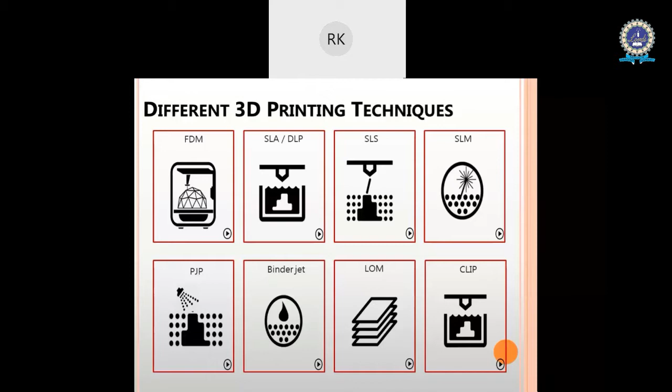So this is a brief about 3D printing. And we should also talk about the advantages before getting into the demo session for today.

The advantages of 3D printing are large. There is no need for a large setup or procedures which we need with CNC, tooling, die creation, milling, drilling, cutting - a lot of processes. These processes are nowhere needed when we have a 3D printer in hand. We can directly complete the process and get the things out. So there is no need of large setup in the 3D printing process.

So next is the limitation. What are the limitations in 3D printing? There are no limitations on complexity and creativity. The major thing I am working about is you have an idea, you can execute it in any of the 3D modeling software, get the project object out, and then you can 3D print.

For example, we have so many softwares like 3D Maya, Ansys, Catia. You can just design your file, take the file out of it, save the file, and print it without any complexity. If you go to regular manufacturing, it is very tough to get the object out in minimum time, and complexity issues will always be there. So that is where 3D printing has the biggest advantage. There is no limitation of creativity or complexity.

Next is shorter time to fabrication. Shorter time to fabrication is when we think about the design of the object and then we are getting the object into your hand. The complete fabrication time is very less in 3D printing. That's where you have the highest advantage, 3D printing giving you shorter time to fabrication.

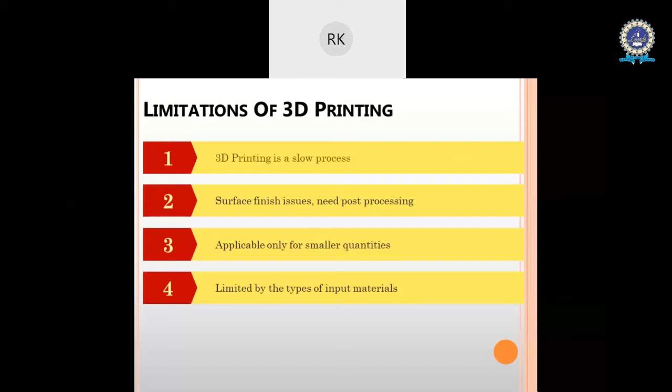And then limited by the types of input material. We can't combine materials, for example, you can't combine polymer and metal. So these are the limitations and advantages of 3D printing.

Next, I want to get into one major thing, what are the sources. We all talk about 3D printing, but people should know what are the sources from where we can start the 3D printing idea or additive manufacturing idea. There are three major sources. One of the major sources is scanners also. As I am telling, there are 3D design softwares where you design your file and save the file in .stl format.

Standard tessellation language format, and then you get this STL file for the 3D printer. We then pass the STL file to the processing software, and then we can 3D print it. So in that way we can do it.

There is also another source: so many websites which give you STL files. For example, there is a website called Thingiverse, where you have a lot of STL files. There is no need to do the design and create the STL file yourself. From there you can take files that are appropriate or sizable for your present use. So you can just download the file from Thingiverse and use it as input for the 3D printer. That is the second source I am talking about.

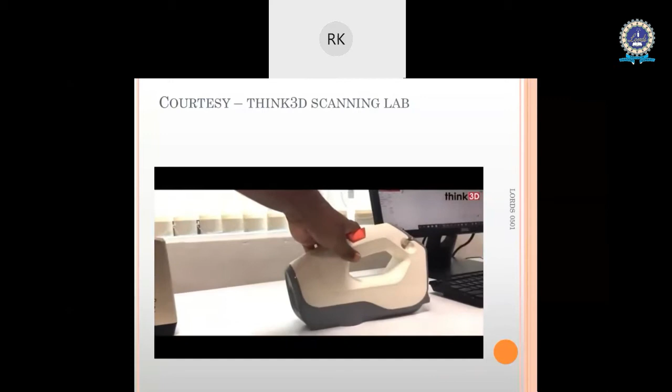Now these are the handheld 3D scanners. This is Sense from 3D Systems; it uses photogrammetry with depth sensor technology. This is Einscan Pro Plus from Shining 3D; it uses white light technology with an accuracy up to 100 microns. This is Artec EVA; it also uses white light technology with an accuracy of 100 microns.

Now these are the desktop type scanners. This is Solutionix C500 from Medit. It is a blue light scanner with an accuracy of 10 microns.

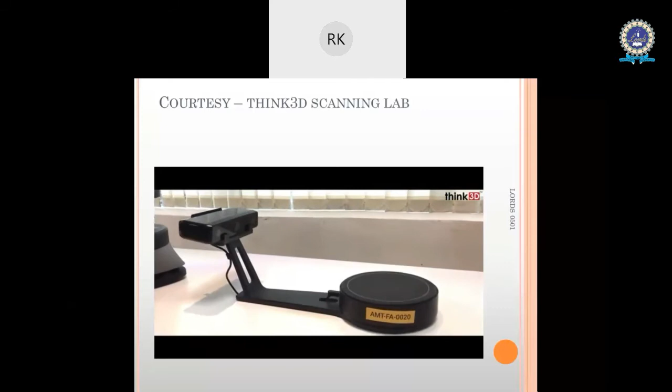This is Einscan SC from Shining 3D; it has an accuracy of 100 microns and uses white light technology. Now this is an intraoral scanner from Medit; it has an accuracy of 5 microns and uses blue light technology.

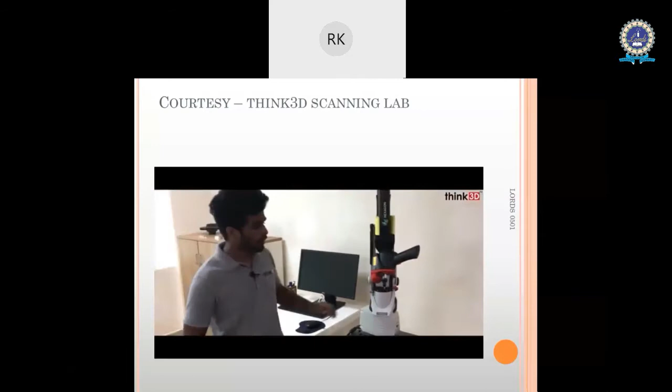Now this is Absolute Romer Arm from Hexagon. It has both scanning and probing inbuilt. It uses laser technology and has an accuracy of 40 microns.

Let's see a demo of this 3D scan. Here, we're going to scan a filter of an air compressor using a Solutionix C500 scanner. Being a desktop scanner, it has a rigid scanner head, and the object is placed on a 3-axis rotating table where these rotations are controlled by a scan path set in the software. The scan path can be customized based on the features on the object and the regions to be scanned.

As this is an optical-based scanner, it has a light source or projector which projects the light onto the object, and it has 2 receivers which receive the reflected light from the object. So let's set the scan path and start the 3D scanning.

If you see this video, this is the scanning which will be happening, where the light source, as explained in the video, the base will be scanning, and then you see the topmost light moving, and your base is continuously rotating to make the object on the screen on the left side. On the left side, you have the scanning being done, and the output is coming into the system. So this is how the scanning will be happening.

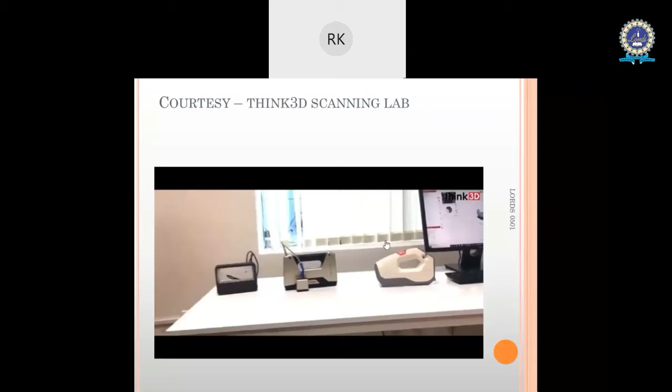The next one is Solutionix, which my colleague in Think 3D is talking about in the video. This is a very high resolution scanner which can give you an output of 10 microns also. This is from the Solutionix company, from Medit, which is used for high-end scanning purposes.

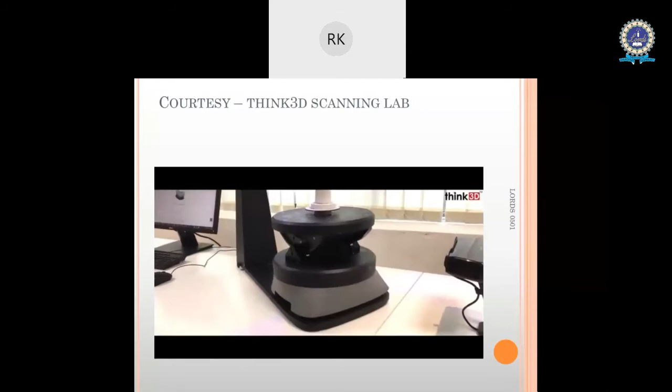This scanner has a rotary table on three axes which rotates in coordination with the light requirement, and it scans the object. This scanner is used a lot in high-end industrial purposes.

The next one is also an Einscan, which the video was screening, but this white light technology does not have that high accuracy. This has an inbuilt rotating table. It is a small setup. This is also for the education version. This is called Einscan Pro SE. This model has accuracy up to 100 microns.

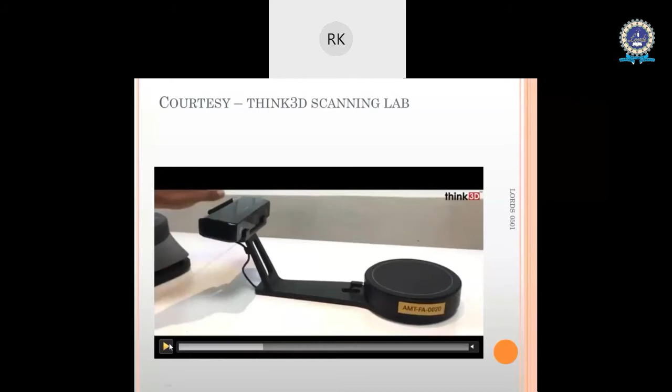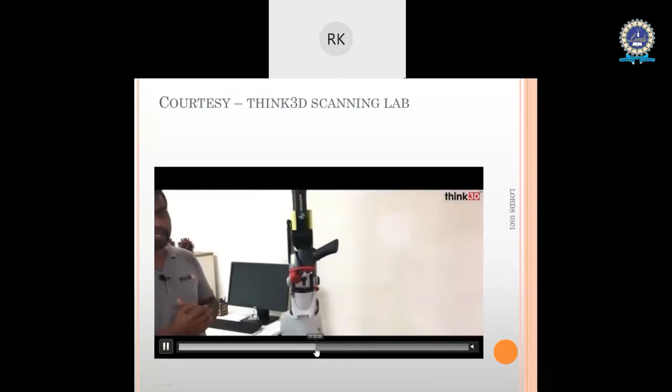This is a foremost advanced scanning technology where we use an arm to detect the output, you take the output out of it, and then we use the image, and this is a laser light. The major difference between the other scanners and this one is it's more accurate, and laser light will be there, but still we have the output coming in very nice ways, because this is the only solution scanner which is giving 5 to 10 microns. Sometimes it gives 5 microns also for the object.

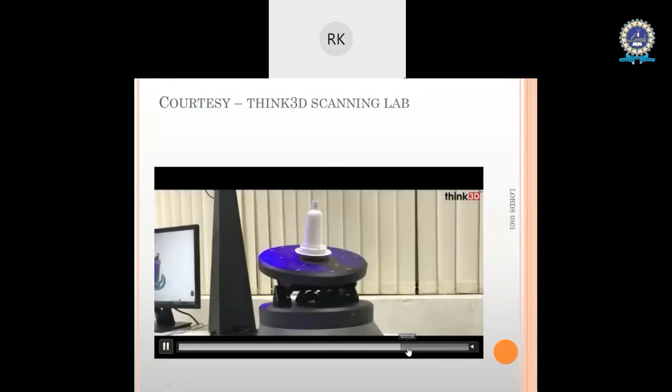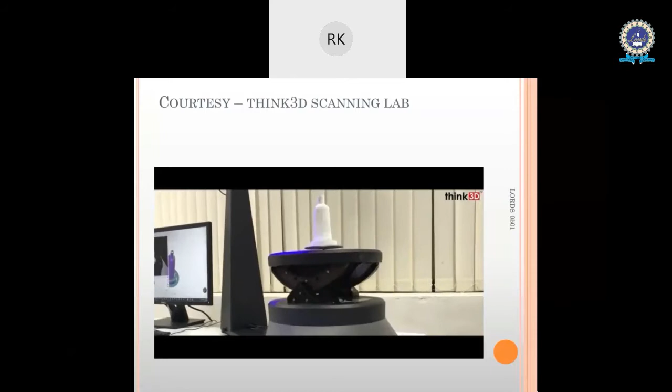So you can see the left screen, the camera is projecting on it, and then the light will be projecting on it, and then you see the rotating table moving in all the directions in all the axes to make sure the complete object is being scanned. And the main line of 3D scanning is one light will be projected, and the light diffraction is being generated as an image or a file on the back end of the system, and then the output is being generated. So that is how the complete scanning will be happening.

If you see on the left side of the screen, you have this pink color output coming out after the light is focused on the system, and then it is being checked, and the system is more accurate, and all the intricacies and all the movements can be done. You may be wondering how we can mount this particular object. We have some mount points on that particular base where we can fit the object.

And suppose you may have the doubt how we can do the beneath area of the object. See, this is how we will be doing it, and afterwards we rotate the object and keep it on the base table, and then we scan it again. The system automatically takes the particular object in all the areas, and the base is also getting scanned, and then you will be getting the output from it. So this is how the scanner works, and the scanner principle will be the same.

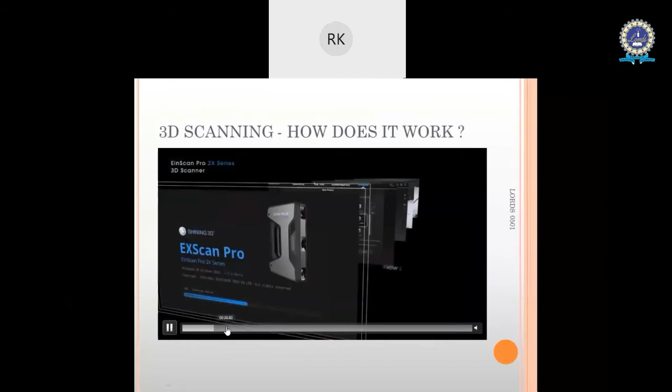And then I have told you about EinScan, so you can just have a glance at the same EinScan system. This is a company video, but I am trying to make sure that you understand better, because the scanning can be done in different ways. If you see, there are so many ways in which we do scanning. This is a handheld scanner where it can scan any object. Now it is scanning a seat, and it is taking all the data into the system, and then you get the output. See, this is how we get the quality.

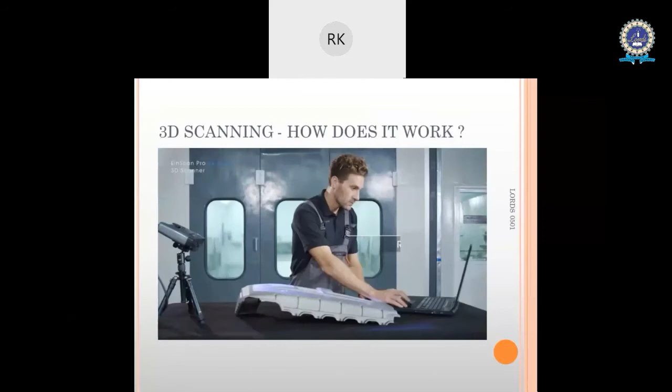The quality of the object will be excellent. You will not imagine how good a quality you will be getting. Even the face structures, these things also will be captured very well. And also, you may be having a doubt: can we use a reflective surface? No, a reflective surface we can't scan, because the light will be reflecting back and you will not get the output out of it.

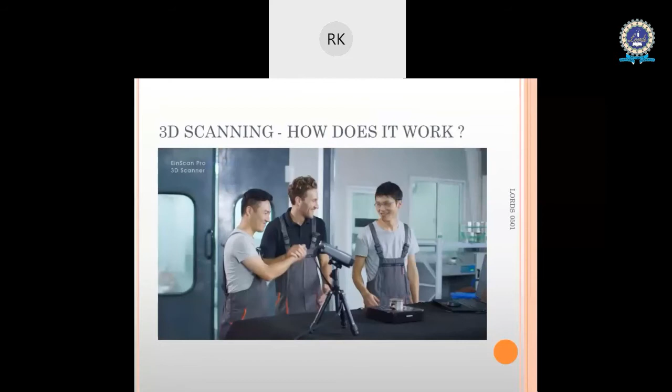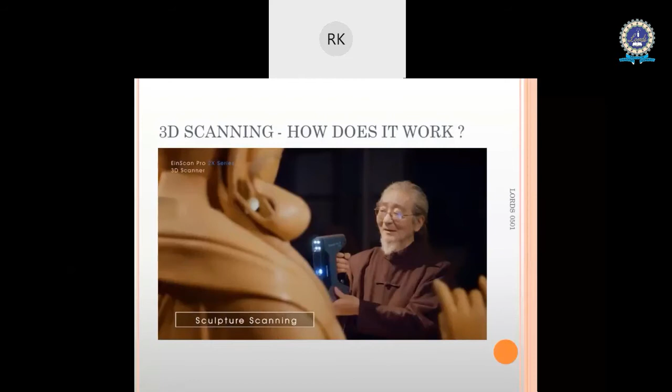So, coming to architectural scanning. See, we have architectural scanning also. We can have the outputs, and then we can take the outputs of it and process it. See, this is one of the processes where we have scanned it, and then we can take it. This is an architectural thing. You can take that particular image, scan it, preserve it, and even save the file in .stl format.

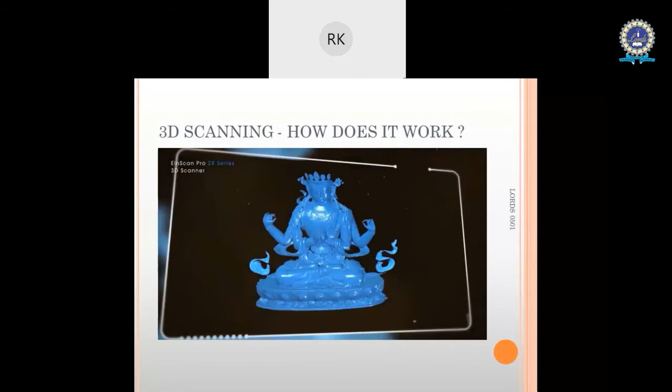Then you can print as per your requirements. Your idol may be destroyed, but your soft copy of the idol will be existing as it is, as a soft copy you are seeing on the screen.

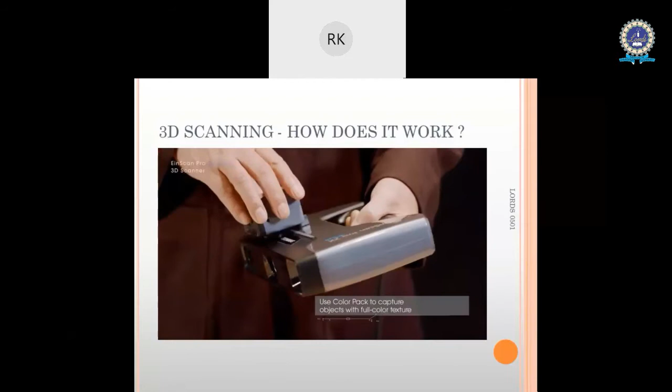Coming to the complex structures or symmetric structures. In the symmetric structures, we have to put small dotted labels and then we scan the object, because dotted labels give you a clear pattern and then we can get the output of it. In this example, in the video which you are seeing, it will be giving a multicolor object also, which we can scan, and then we can get the multicolor output also from the scanners.

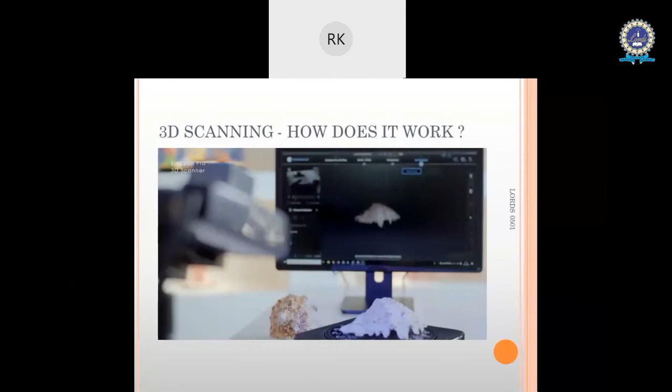So that is the way we can scan the objects, and then we can take the file and save the file in the 3D printing format. So this is how we scan the object, and this is the scanning which we discussed, and the scanning of objects will be done like this.

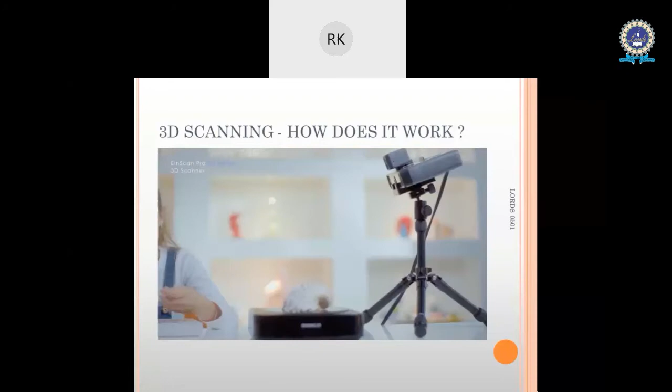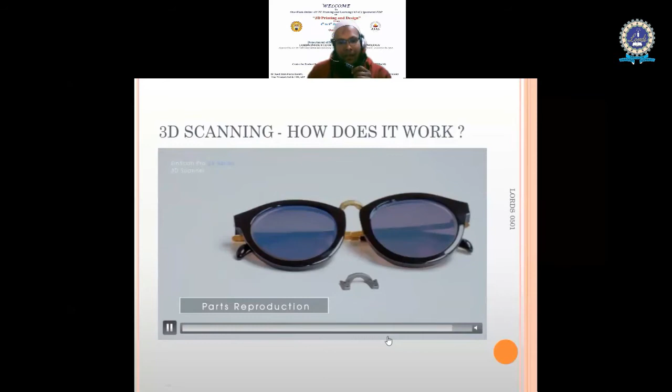So before getting into the next thing, I just want to take any questions on scanning, because I am going to the FDM and SLA demo, which is a bit different. Mohammed sir can open for 2 or 5 minutes for questions, so that I can close this scanning part and then go to the next level. Sure, sir. All the participants are requested to ask questions or any queries regarding these scanners. So the first question will be mine, sir.

Sir, for different applications, for different accuracies, we use different scanners. That's the only reason? Yes. We have different uses, for production or for reverse engineering of complex structures. We have different uses in terms of accuracy, in terms of color, shade, and appearance.

See, to explain in depth, I have shown you different ranges of scanners. For example, for medical purposes like dental, there are separate scanners. Coming to engineering applications and smaller applications, which we can mount on the build plate, we have some scanners. And if you want to do freehand scanning, which I showed with a car being scanned, that scan also you can do.

But for the range of accuracies, depending upon your requirement and the complexity of the object, the first and foremost thing is whether we go for a handheld scanner or a fixed scanner. If you want the highest dimensional accuracy, you have to go for the fixed mode, which gives excellent output.

With handheld scanning, there is a chance of the hand shaking, so the accuracy may differ. For dental, we can go with dental scanning, but in engineering applications we talk about 50 microns, 10 microns. So depending upon the object accuracy you need, you can opt for any of the scanners I have shown you. Hope I have answered your question, Mohammed.

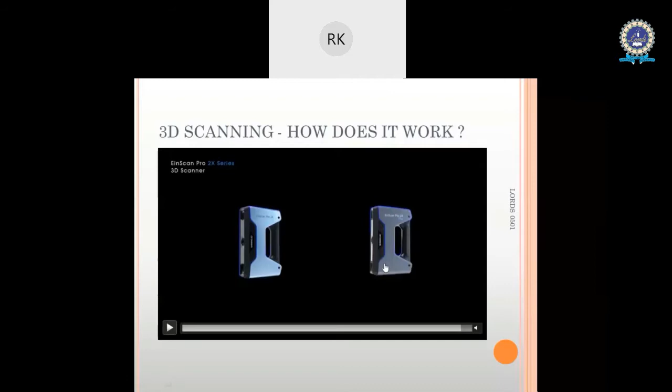So fine, guys. You got a brief idea about scanning, I believe. So I'm just getting slowly into FDM, which we want more knowledge and clear information on. We did the 3D scanning, we got the file done, and then how do we print in a 3D printer? First question people will be thinking: I have a design file in my college, we have ANSYS, Pro E, CATIA, we take the file and we are ready with the STL file.

What next? After your 3D model is ready and your STL file is ready, the next two important stages to consider are the slicing software, then slices and toolpath. What is this all about? Before slicing software, we should understand what FDM is and what it does. So I'll just give you brief information, because people all know about FDM technology.

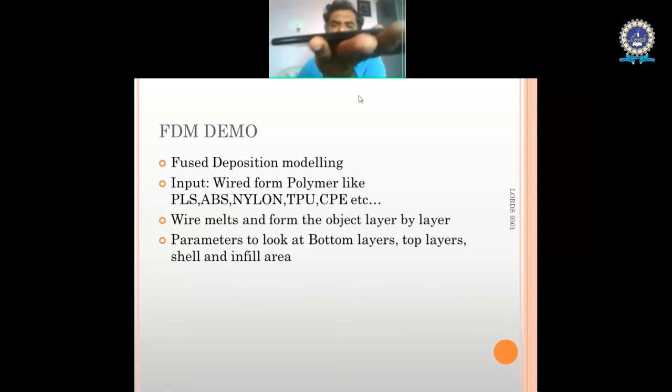It is a layer by layer approach to form the object. We give the wire input, and it comes out as small droplets on the build plate, and then it prints on the build plate. A 3D printer will not understand anything else. If you see my video, it will only understand bottom, top, shell, and infill area. Shell means the outer area.

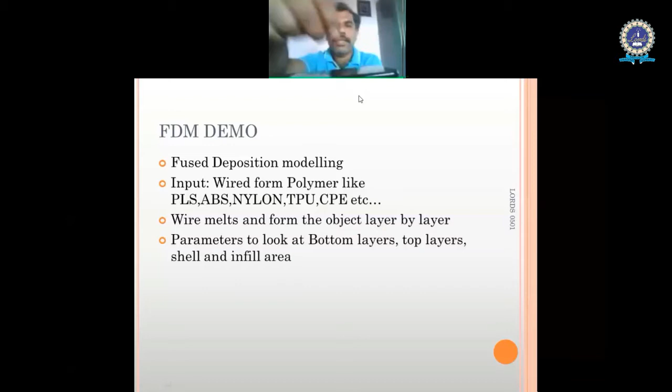So any object we see in 3D printing, it will consider as bottom, top, shell, and infill area. The 3D printer understands only these things. So you should understand on the part whether the bottom is clear, the top is clear, the shell is clear, or the infill is clear. Once we understand that, we understand what slices are.

Pardon, sorry, any issue, sir? No, sir. There are some questions. What about the surface defects, voids, micro cracks while scanning? That's about the scanner. In the last session we're going to have the question and answer session. No problem, sir. You can proceed. Okay, fine. I'll take up this question in the question answer session, at the last.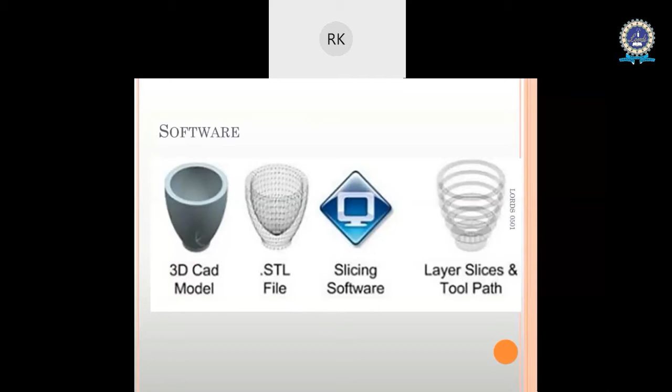So, as I was discussing, slicing software. We have the CAD model, STL, and the slicing software. The 3D printer understands only bottom, top, shell, and infill area. It will not understand any other parameters. So I'll just take things into Cura software.

Hope you are seeing my screen, sir, or only the PPT is getting shared. Your screen is visible, sir. You can continue. This bottle is being seen, right? No, sir, only the PPT is visible. One second, sir, I'll just take the things. Now it is visible, sir.

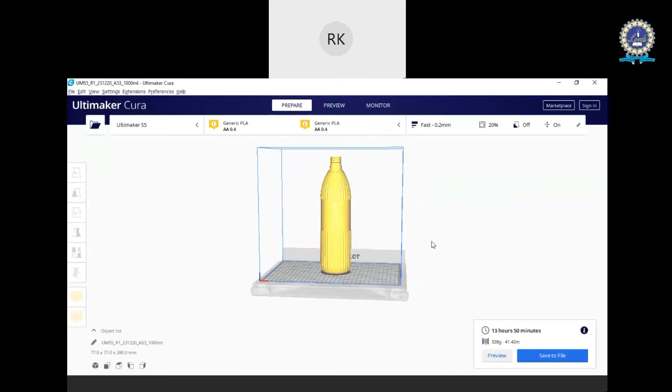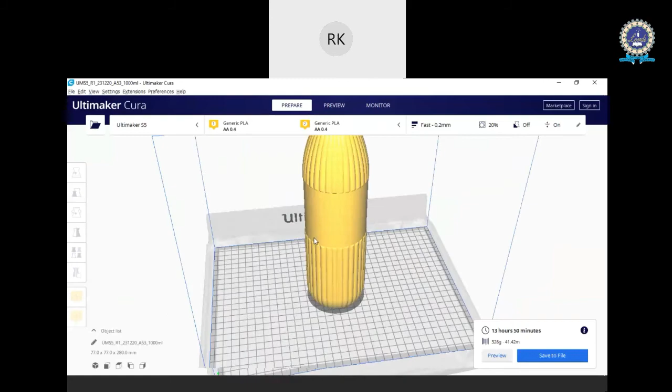Cura, yeah. So you are seeing one bottle very clearly. This we are going to 3D print. So if you see here, the 3D printer understands only the bottom area, the top area, the infill, and the shell of the complete bottle. Now you see one object I am taking.

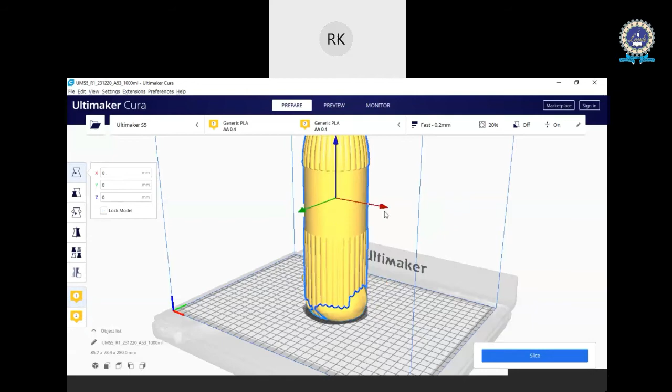This will have some certain infill area. Means if you see, you have a 3D printer. We have this object. If you see this object, we have bottom, top, and then shell and infill area. So we have different shell and infill areas which we are getting on the base, and then top and then infill area.

So what I want to give you the information is you should understand bottom, top, and shell and infill areas, which we have to clearly define in the object before we go for this slicing software. So getting into it, you are seeing a screen here. This screen is called Cura software.

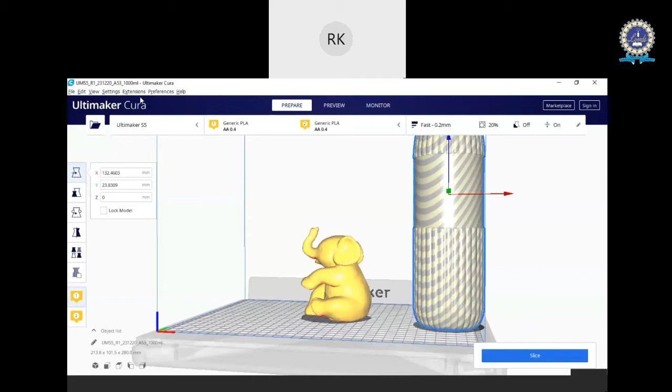This is an interface between your 3D model which you have designed in a 3D modeling software, and if you save the file in .stl format, that particular STL format, you have to get that file into the system. You have seen my screen where I am saving the file in .stl format, and then that file will be coming into the system like this. And this system has a lot of parameters. As I told you, we have a lot of parameters which we have to see.

We have layer height. We see briefly. I don't want to take much time. I'll just show you the brief information which is basically needed for all people. Quality, shell, infill, material, speed, travel, support, cooling system, and then build plate. So these are the parameters which we talk about in all the 3D printers. You can talk about them in any of the 3D printers. You have to have these parameters in your mind.

As I told you now, bottom, top, shell, and infill area in the perspective of the model which you want to print. In the perspective of the system, we have to understand that we have to get a good quality. For good quality, you have to give the system these parameters. See, layer height. What is layer height? You all know how the 3D printer works, but I'm just playing a video for you to make sure you understand better.

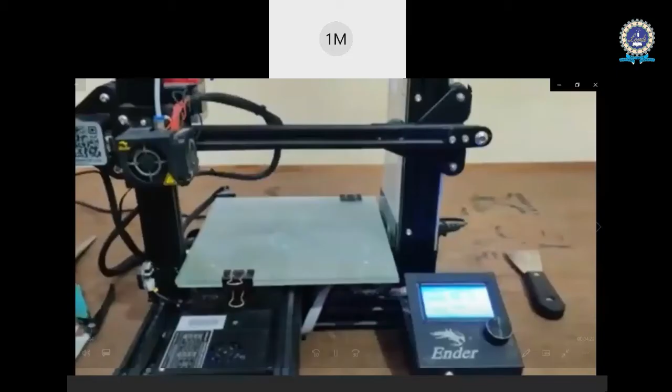So you are seeing a 3D, sir. Hope my video is audible, Mama sir. Video is visible, right? Yes, sir. Visible, sir. Visible. Yeah.

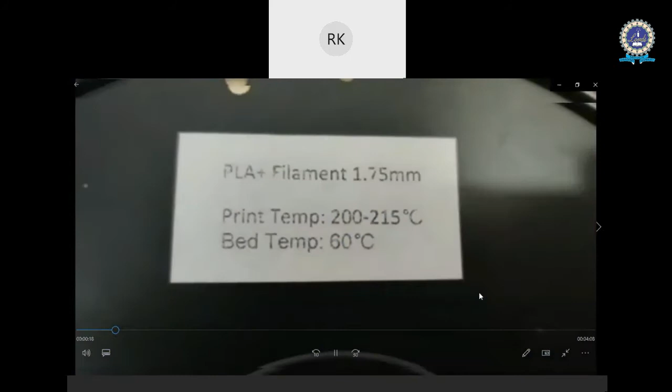See, this is a 3D printer, Ender series. If you see, this 3D printer has a build plate, and then you have a nozzle here. This nozzle is the place where the material will be extruded, and then this is the build plate area where your part will be 3D printed, and this is the area where your complete feedback system will be given from A to Z, what is the temperature and everything.

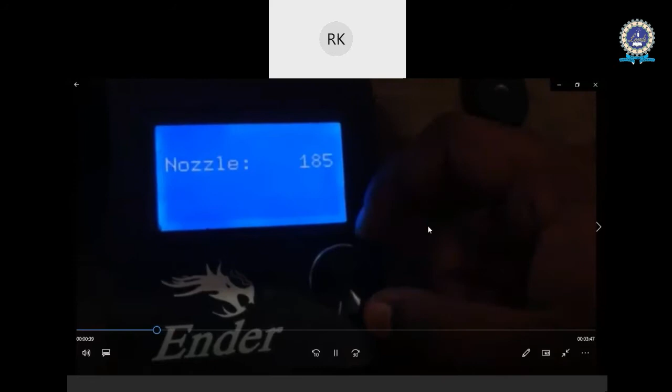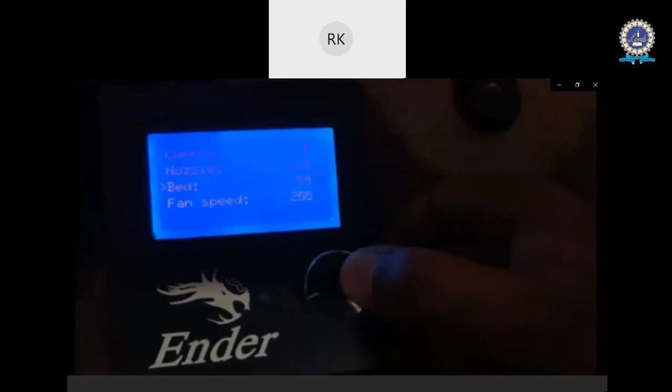I'm just preparing you on the system of the 3D printer before I get to the Cura software. To help you understand better, I'm showing you the printer video now so that you will be more clear. All the settings we keep, nozzle temperature and everything. Depending upon the melting point of the print material, we have to give the temperature settings here. Some materials don't require bed temperature. Some materials require bed temperature. Like PLA material, we have bed temperature.

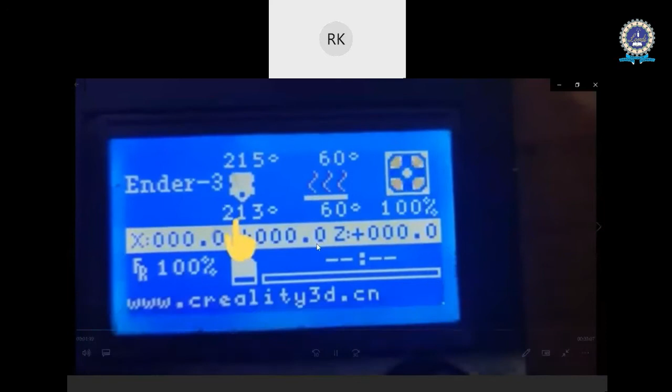So same thing. Once we start, you see the nozzle getting heated up slowly from what we have set, 215 degrees centigrade. The nozzle gets heated up, and then the build plate gets heated up to 60 degrees centigrade, and it forms layer by layer to form the object.

So how do we insert a material into the printer? This is how. I told you material gets inserted into the nozzle slowly. You see here, material slowly gets into it. We take that spring action and then we push the material up to the nozzle, and then we release it.

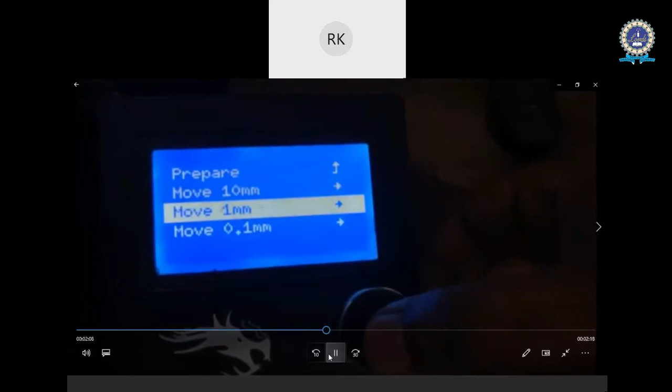You see, once the material touches the nozzle, material will be coming out of the nozzle like this. These are the small drops of material coming out in a liquid, semi-liquid form. It will be coming out from the nozzle like this, and then it will be falling on the build plate.

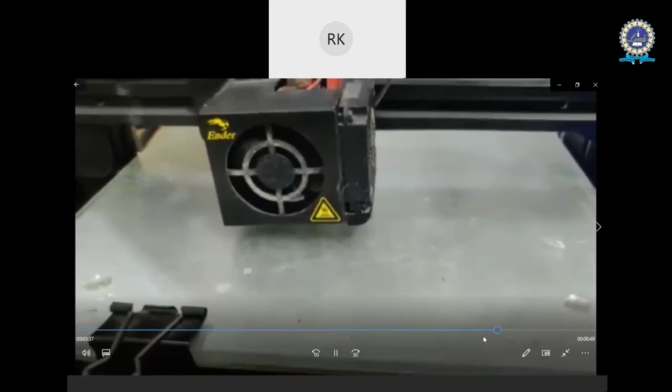You see, slowly the printer starts printing, because the material just touches the build plate and then it starts on the layer. On the build plate, you can see the layer by layer. Slowly, it will be layering on the build plate, and then it will be printing it layer by layer to form the object. This is how the complete FDM process works.

Small droplets from the nozzle will be falling on the build plate to form the object. So finally, you see the object while printing, and after printing, the object will be coming out like this. So you are seeing all the post-processing we do, and then we get the final output like this.

So hope you now got an idea what a 3D printer is all about. So coming back to the Cura software.

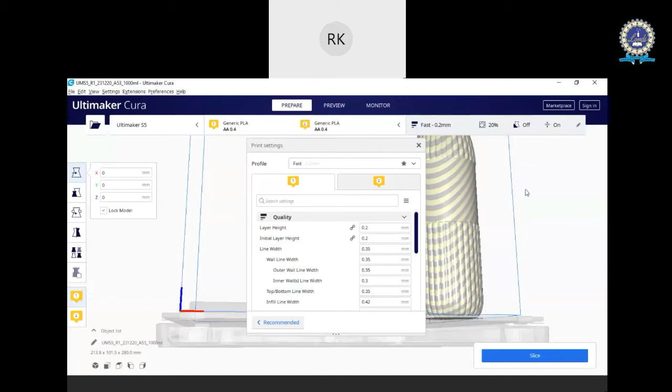Coming back to the Cura software, as I told you, layer means layer by layer to form the object. So first layer will be building on the build plate, and then the next layer will be building on the build plate. Layer height is nothing but the distance between one layer and another layer. That distance is the layer quality or layer height.

The quality will be more if the distance between layers is very less. If the distance between layers is more, the object will be looking ugly, as I showed in the video. Because we printed it fast, the distance between layers is more and the object quality will be worst. If the object quality is good, the distance between layers will be very less.

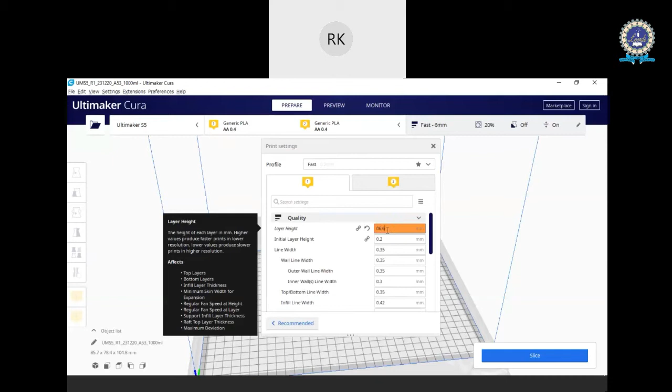How do we define it? In this, we can give 0.06, 60 microns, or we can give up to 600 microns also. But you should be very clear while giving the object layers, which distance we have to maintain, what quality we are expecting, and what the output will be. So layer height is a very important parameter in 3D printing slicer software, where your object quality will be seen on these lines.

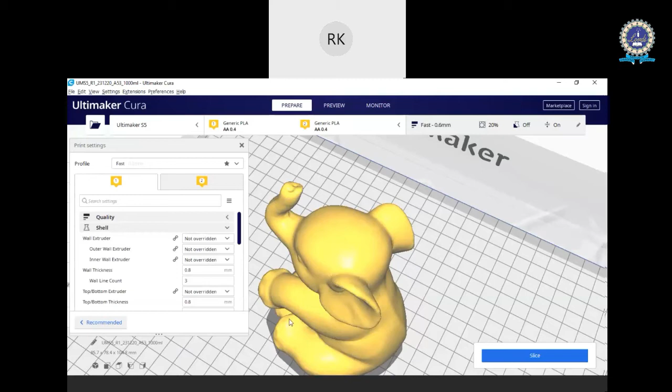And then shell, I told you, right? We have this small elephant here. This complete outer area, this area, the elephant, the ears, everything whichever is seen in the front view - because all are mechanical people, front view, top view, and side view - this is shell. All front views, side views, right side view, left side view, and the rear view are called shell. Simply we can term it like that. This complete area, shell means the complete area, the complete side things of the object.

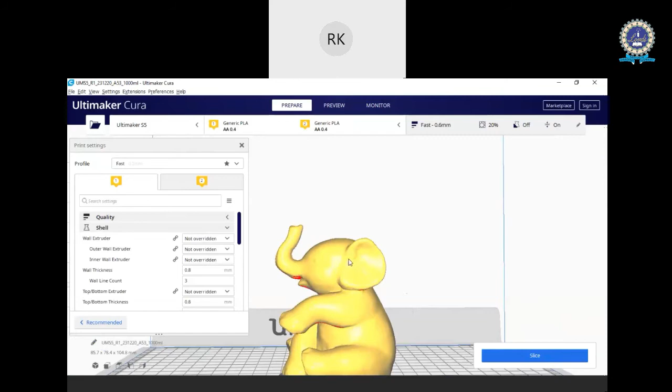As I told you, bottom layers and top layers. This is bottom layers. Top layers are the last printable areas, called top layers. So in this shell also, there's outer wall extruder and internal wall. On the outer side there will be a layer, and on the inner side there will be a layer, and then infill area. I'll just slice it and show in simulation, so hope you understand it clearly.

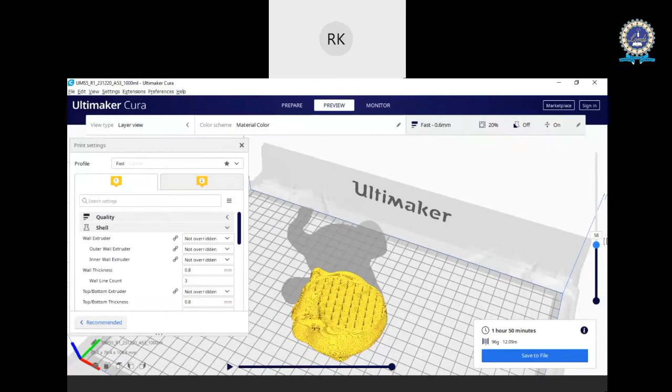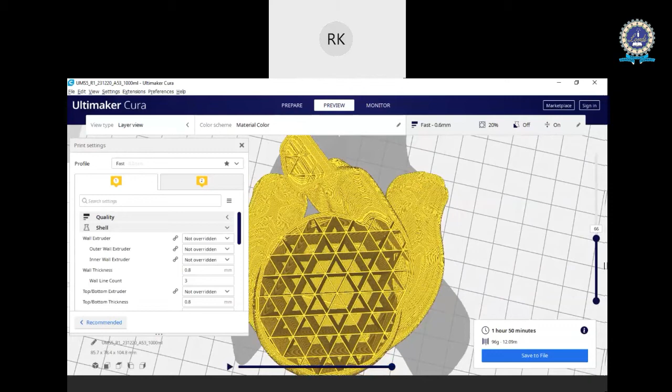See, you see some areas here. This is outer shell and inner shell, and then you have one more - all hexagon lines here. This is called infill area. Bottom you have seen, top you have seen. While printing, this is simulation where you see the object being printed like this, layer by layer to form the object. Finally, these are the top layers, these are the base layers, and slowly when the printer prints, this is the top view you are seeing.

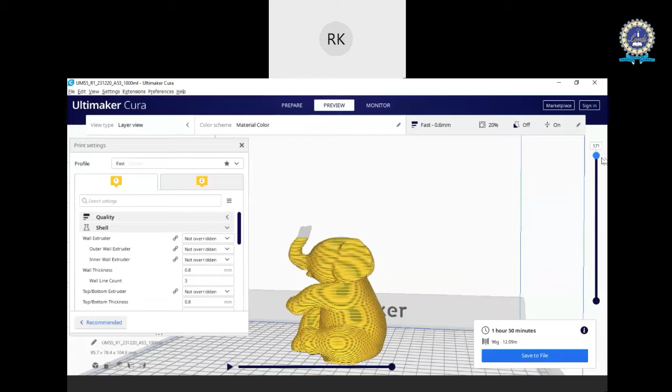If I show you the side view, this is how layers will be building. Hope you are getting me, hope all of you are getting the idea of how the complete 3D printing will be. So this is the top layers. This is how the printer slowly builds from base - bottom layers, infill layers, shell and infill area will all be there, and finally it comes and prints like this. So this is how the complete layers will be seen in the system, and then the printer will be printing.

So I have told you about quality - layers, once we take the layers from base, 1 layer, 2 layer, 3 layers, and so on. Right now we have taken the quality as 600 microns. For example, if I take it as 600 microns versus now taking it as 60 microns, the number of layers will be increasing. If you see, now the slicing engine is slicing the system.

If your layer height is less, your quality will be excellent. If your layer height is more, your quality will not be good. So that is the major phenomena you should understand while 3D printing any object.

Also, it is slicing, I'll just come back to it. I have already spoken about shell, right? We have one more called infill. I have shown you in the video - internally, there is an area where it has zigzag lines, meaning you have hexagon lines, and we have triangles in that particular thing.

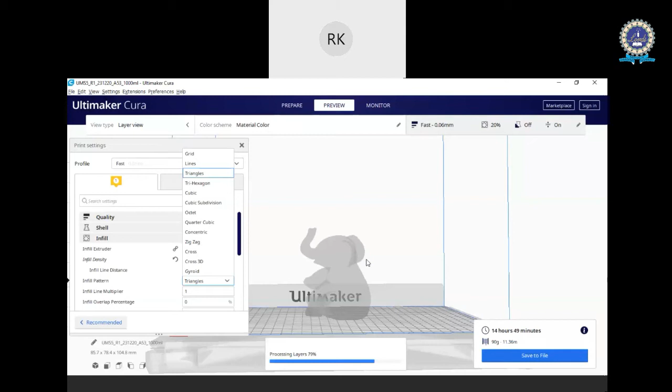I have given a triangle in that, that's why it was showing triangles. We have multiple infill patterns. That is the area which is in between the bottom, top, and shell of the object. That in-between area is called the infill area. You can give that infill area as hollow also. If you give 50% infill, it will take 50% infill. If you take 10% infill, it will take 10%.

See, if you have seen here, the layers have increased to 1744. Previously it was 171, because of the microns which we have changed in the quality. That's why your quality will be completely different when compared to this system.

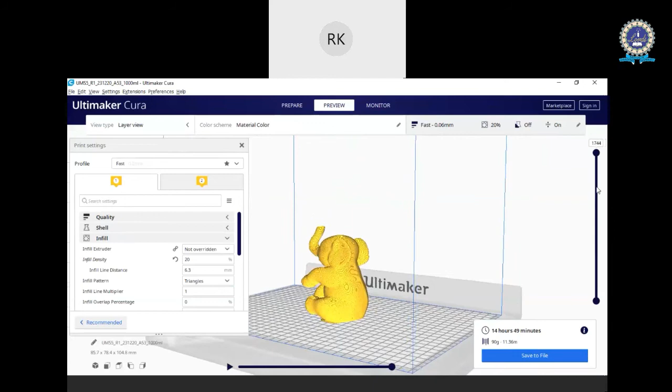See, if you see the layers here, now I'm talking about infill area, right? This is infill area, hope it's clear now. This is infill area, this is shell, and this particular area beneath on the base is bottom, and the top one is the top. So this is infill area.

Right now it is 20%. If I increase the infill to 50%, your triangles also will be changing, and your slicing will be completely changed, and your timelines will be different because you are taking more time to increase the strength of the object, and your infill area infilling is becoming more and more. So infill is always very important.

See, if you want a hollow object internally, if it is hollow, its strength is very less. Once you catch it tightly, it will be breaking off. And for example, if you increase the infill area to 100%, it has 100% strength, and the object will be very strong, and also the weight of the object will be more.

So the infill system or infill pattern is very, very important, where we have to check the infill systems, and then quality has to be very good on this line, so strength will be high.

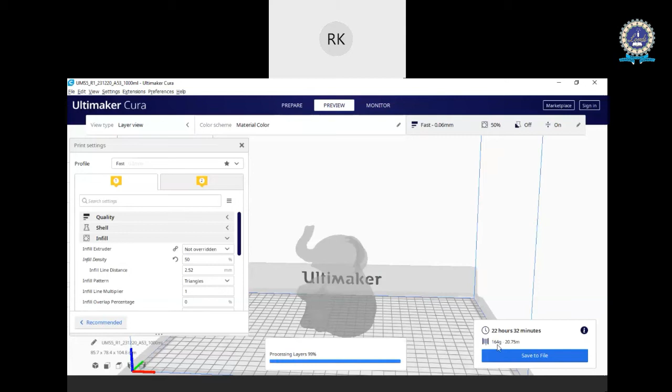You see, I have increased the infill, and then your time also has increased because it is consuming more material also. It was 90 grams previously. Now I have increased the infill.

If you see the lines previously and now, your triangles have increased more and more, and internally the strength of the object has increased more, and then to get the output of it. So this is how the infill will be increasing, and your quality of the object will be increased, and strength will be increased if your infill parameter is changed and the system is good on these lines.

And the next parameter which I have to discuss is material. The material you are giving as an input, you have to feed the same material temperature, melting point or printing point, temperature, everything. Meaning the material which you are giving, you have to match the parameters which we give in this system.

So initial layer you can control. I don't want to get into the deep of the systems, because this is the basic settings which I am giving. You can even control a single layer also in 3D printing. That is the advanced stage of 3D printing, where you can take it to the next level, and then you can do it on these lines.

So coming to things like build plate temperature, build plate initial layer, standby temperature, these things, nothing you need to understand much. You just need to understand which material you are keeping, what is the temperature of the material, the melting point of the material, and whether we have to give bed temperature or not.

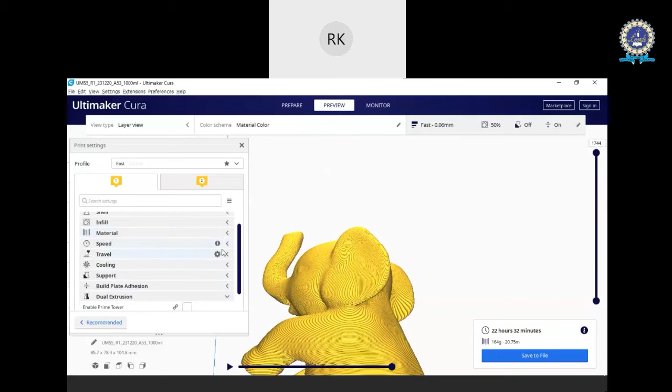And the next one is speed. Depending upon the speed, your object will be printed. Again, the quality will come into play. If you increase the speed or decrease the speed, your quality will get affected. If your layer height is less, you have to give the speed as less. If your layer height is more, you can give the speed high, but quality will not be there.

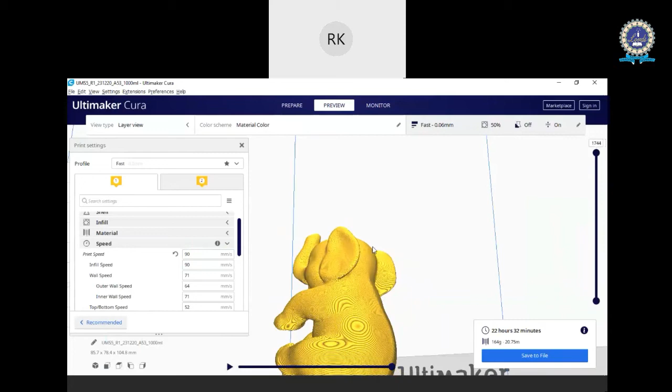Print speed and layer height are both proportional, you should be giving the same parameters. For example, high speed with high resolution or high layer height, and slow speed you can give both. When you want a good quality object, you have to give very less speed and less layer height to get the quality. So speed is also a very, very important point which you have to consider.

See, travel is nothing but the nozzle printing multiple objects. Then you will be getting multiple things which you have to consider, and you have to give multiple speeds at one area.

For example, you have one elephant here, and one more elephant. When the nozzle is printing this elephant and moving to the other elephant, there is a travel time where no extrusion is needed. So from this point to another point, the speed can increase, and then it develops the object. Coming to travel, there's material travel or non-travel speeds, and enable retraction settings.

These settings are very deep settings which we can understand once we know the basics. Coming to travel speed, this is the basic thing I want to give you: travel speed can be increased where the nozzle is not extruding material, so you can move it forward faster.

Cooling is not something to worry about, it will be automatically taken care of by the system. And the next most important thing is support.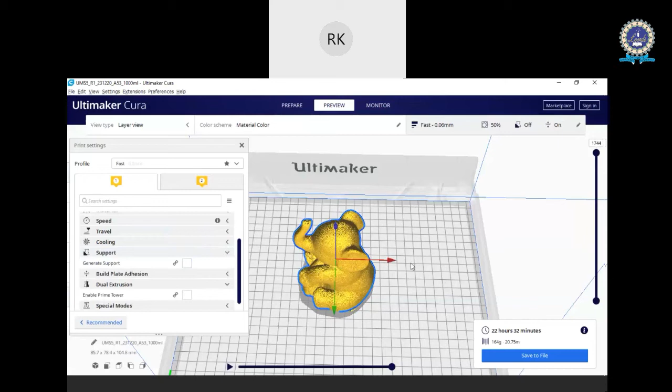If I talk about support, in this object I am not getting any supports because of how it's oriented. For example, if I rotate the object into a different orientation, then it requires support. It's nothing but small pillars, like we place while building a rooftop. So there you have more support material, and the support generated can be peeled off.

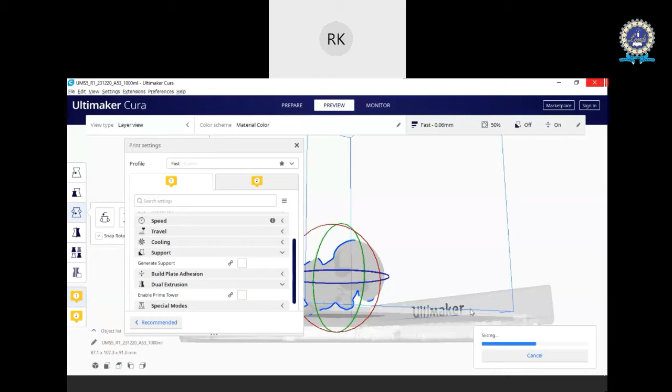In my previous video I showed you supports being taken and then removed. So I'll share that video again to help you understand more through the slides. This is how supports work overall.

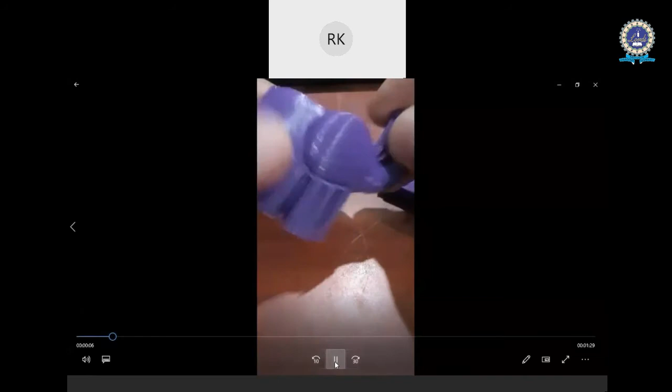If you see this video, these are the support materials I told you about previously, which we give before printing, like this. These supports will be removed in post-processing to get the quality of the object. So we use different post-processing techniques to make the part clearer, removing the support, and then we get the object like this.

So these are honeycomb structures. Actually, these honeycomb structures give a good output. They don't have much strength, but they serve well as support to develop the object.

That is how we remove the supports and get the object out of the printer, removing the supports like this. This is a worst case print at 600 microns. If you keep that setting, this will be the output, because you get a lot of visible layers on the screen.

Coming back to the PPT. As I told you, I hope FDM is clear, where I've explained infills, supports, and temperature in detail. I've already given that information.

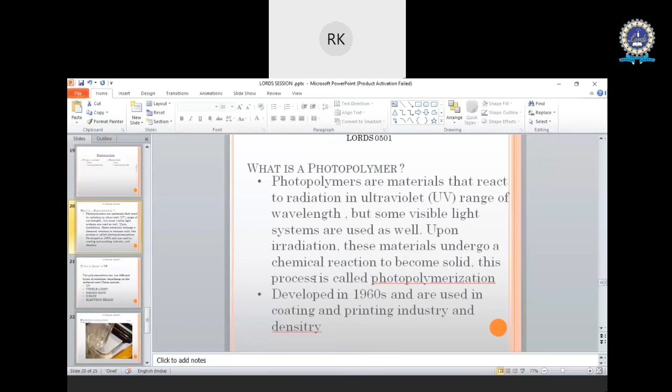So moving to the last topic, SLA, which I have to cover as part of today's session. We've talked a lot about resins too. To get deeper into that, I'll play a video and try to explain the SLA system to you.

So what is SLA? Stereolithography, as we call it, or DLP, digital light processing. We have multiple terminologies in 3D printing - SLA, FDM, and many technologies - but each technology has its own quality and its own impact on different requirements of the industry or the output use cases.

This particular technology takes resin, a liquid material, as its input, and then the object is formed. In FDM you saw wire being melted and layered to give output. In SLA, resin is the input material, and instead of a nozzle moving around, here a laser hits the object as per our design.

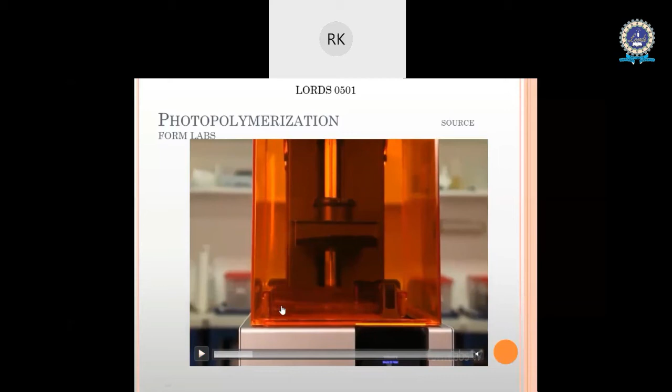In the video I'm playing, the resin is poured into the tank, and this is the build plate you see on screen. This build plate sits inside the build tank. This is the complete build tank, and the build plate lowers into the tank, hitting the resin like this.

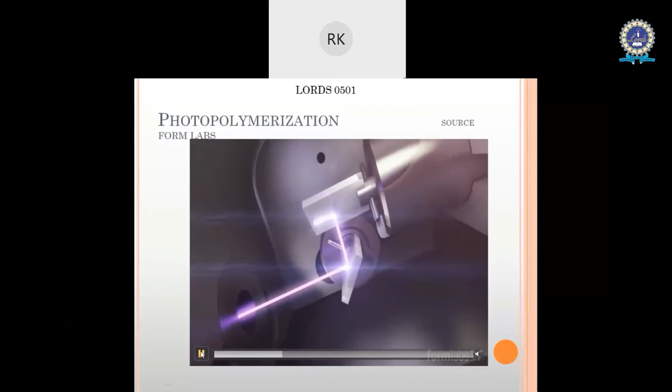What happens inside is there's a laser. This is the laser, and it will be hitting the build plate. If you see here, it's hitting the build plate like this.

You have seen the build plate getting immersed into it, right? You see the laser hitting the build plate, and then the resin, which is a photopolymer. In other words, SLA and DLP, we call it photopolymerization also. I will share the video of what is happening inside that chemical. But first and foremost, just understand what this SLA is all about.

This laser is going on to the build plate, and then it is hitting. If you see the laser on my screen, that laser is hitting the build plate, and the material gets solidified, and then it forms the object. This is how, see, the resin, which is in liquid form, because of the laser, which is hitting the build plate, forms the object like this.

If you see, this is a continuous printing which is live. This is how it happens. So there is a medium of liquid and the laser hitting it, and then it's sticking as a solid. So here the object is formed layer by layer only, but it is inverted when you compare to FDM. FDM is building on the build plate. Here the build plate is immersed into the build tank, and then it is forming the object.

And also we should talk about what a photopolymer is and what is happening inside the photopolymerization process. See, everyone will tell you that this is a very new technology. This is not at all a new technology. SLA has been there from the 1960s, and it has been used in the coating and printing industry, and also in dentistry from long back. So photopolymerization or SLA or DLP, whatever we talk about, it is an old technology.

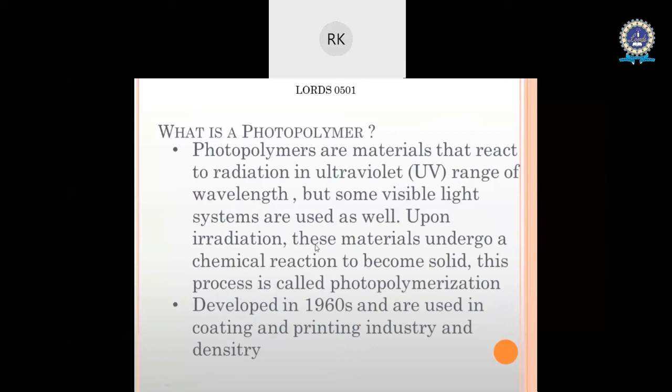So how this happens, as I told you, radiation or a visible light source will be projected onto a photopolymer resin, and then it will react through photopolymerization and form the object. What lights can we use in SLA? We have multiple lights. We use ultraviolet rays, visible light, gamma rays, X-rays, electron beams. So there are many light rays which we use as radiation for this photopolymerization.

And also how exactly it works. See, this is all about a chemical reaction, but to give a basic, clear perspective, I want to show you how this photopolymer works. Actually, the resin is a combination: photoinitiator is one of the materials, and also reactive diluents, flexibilizers, stabilizers, and liquid monomers will be there. This combination is called resin. So all these materials will be there in that particular liquid.

And the photoinitiator is one of the major components, which reacts to the light. For example, in the second line I have mentioned ultraviolet light. Once it hits the photoinitiator in the resin, it reacts with the monomer, then that monomer reacts with the other monomers and creates the polymer chain. So compared with FDM, SLA has a stronger bond.

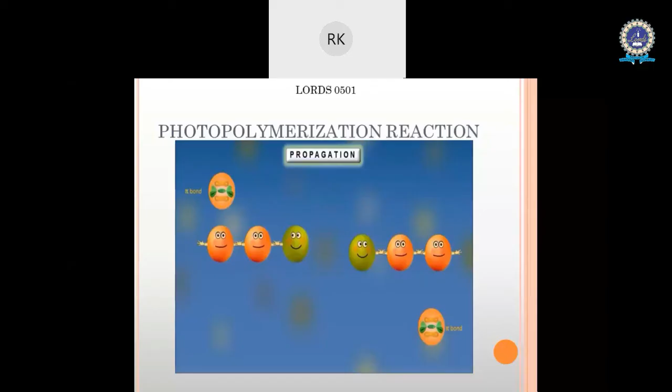As I gave the information basically, I should also talk about what exactly these resins will be all about. We have a lot of resins: standard resins, tough resins, high temperature resins, durable resins, and even castable resins, ceramic resins, and biocompatible resins. We have different purposes: general purpose, functional purpose, and application-specific purposes. In dental we use castable resins, dental material, and also wax is coming these days.

And if you want a functional purpose, high strength and high temperature resistant resins are also coming in the market. So we have a lot of functionality-based resins which are being used in the market right now for different functional needs. For example, for a high strength application or temperature application, different resins are used.

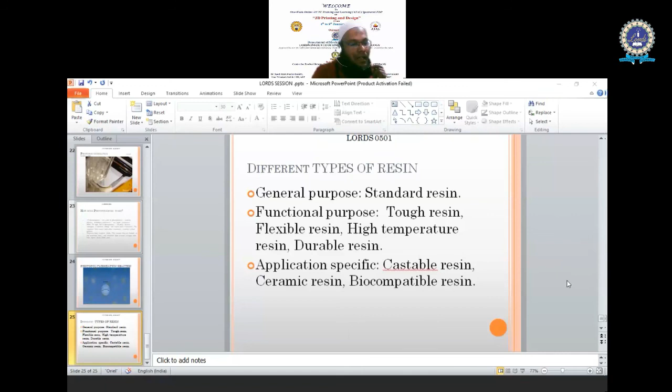And one of the most important parts, I thought, is travel. If you want to build a number of objects in the same build, the distance or travel between one component and the other has to be minimized. That setting is the most important parameter in the Cura software.